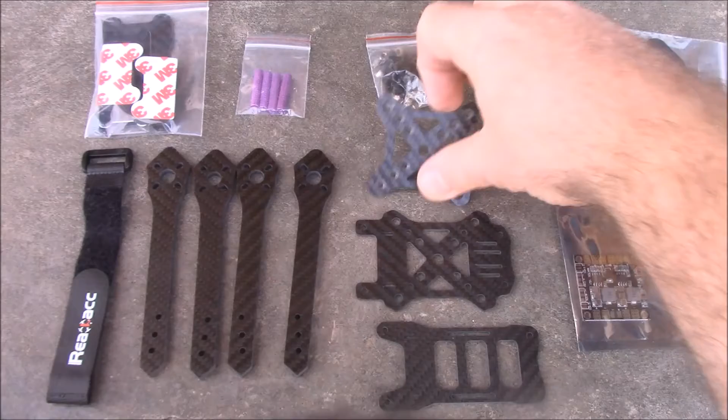Here are all the parts laid out. Now one thing that's kind of cool about this frame, they put these little countersunk screws that are supposed to go in here to help hold this together. You actually have 3 on each arm that you'll use to put it together.

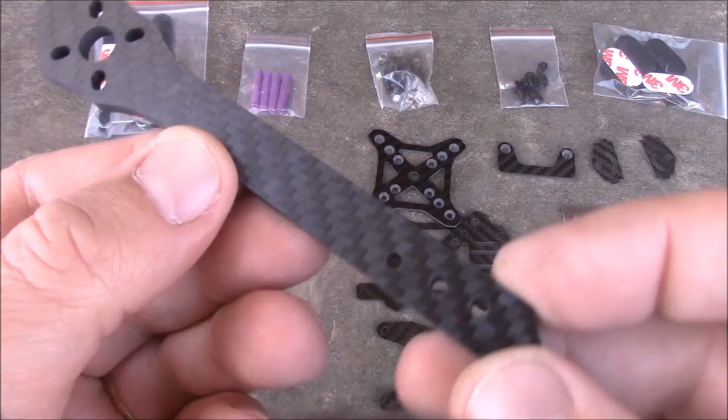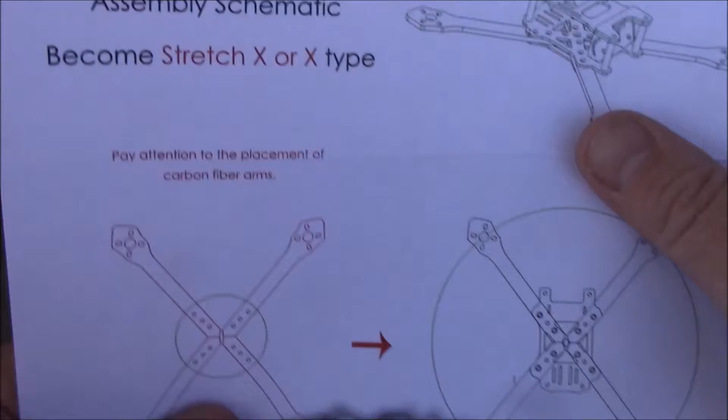Now this is a little bit unique frame. If you look here, you can see how the holes are not lined up straight down the arm, they're kind of angled off to the left. And that is because this is the Angel 220. The Angel 220 is set up so that you put the arms together in one pattern.

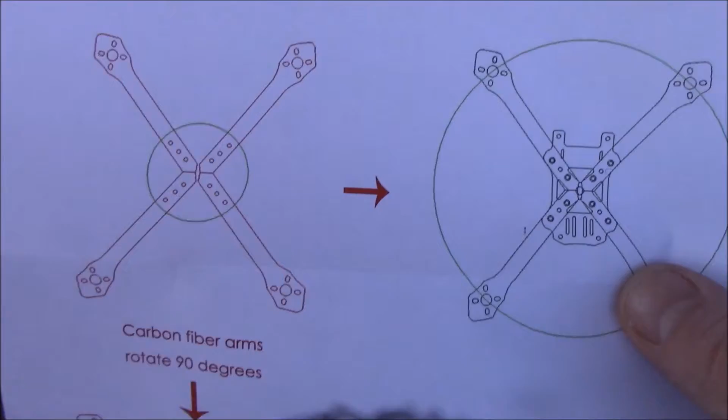You can put it this way and put the pod up on top here going this direction, or you can take it and basically rotate it 90 degrees, and then put the pod on the other way so it's stretched wide. So this one can be stretched forward and backward, or rotate the pod 90 degrees and it stretches wide.

The cool thing about that is you don't even have to change the arms, and the arms are cut with those holes, and that's what provides all the magic. They're not too close to the edge, as you can see, so they shouldn't have any tendency to break. And you have 3 screws in there.

Actually, you'll have 2 plus your flight board in there. But anyway, you'll have at least 2 screws in every arm, helping hold the frame together. Another thing I like about these frames, and I've been seeing this a lot, is when the top and the bottom plate aren't the same. I like it because I think it looks cooler, you don't have the top and bottom plate matching up perfectly, so it gives a little bit better look to the frame itself.

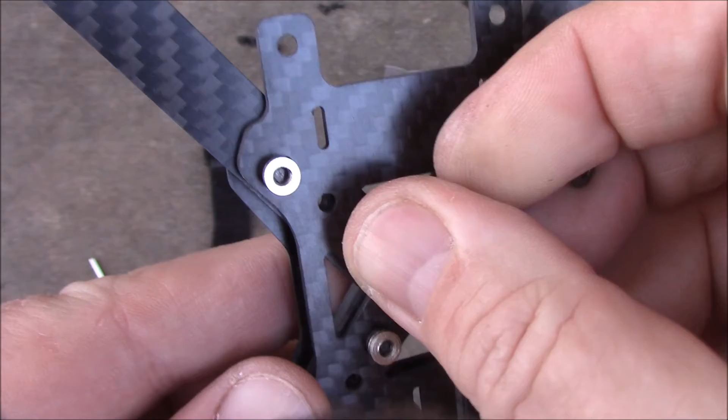Here's the frame partially put together. Now, like I was saying, this is the middle plate, and you can see here this is a little bit larger hole and this is a smaller hole. The larger hole is to accommodate these little nuts of some kind. They slip, the holes are a little bit larger, and these will slip down in those holes. Well, they will when you tighten up the screw.

It'll pull down inside there, and basically instead of having a regular nut up here that you have to hold with a pair of pliers, these will actually eat into the carbon fiber a little bit and provide some grip, so that way you can really crank down on them and tighten your frame up so it's not flopping around.

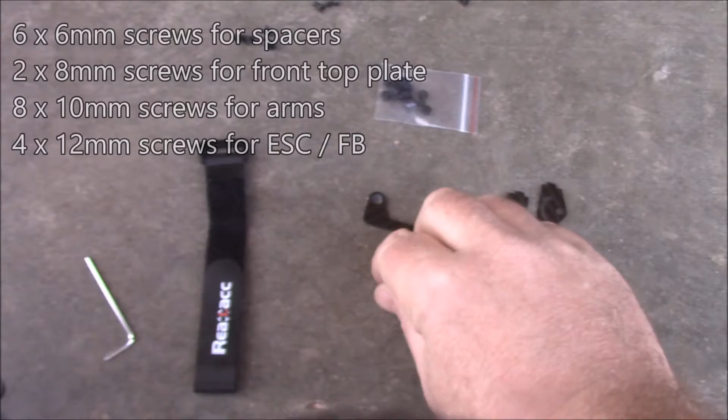Now also on here you'll see it has these middle holes, and this is where the flight board screws will go through. Now this actually came with some really short screws, a little bit medium screws, and a few longer ones, but it had mostly this size here. Two of these 10mm screws will hold on the arms. Each of the arms is going to be held on in the middle and out here on the outer edge, and they go up there into those little nuts.

Then the longer ones will actually be used to go through the middle to connect onto the nylon spacers to hold your flight board into place. Like I was saying before, on the 220, the 4 arms just sit in the same place, and they just rotate 90 degrees to determine whether or not you want a stretch front to back or a stretched side to side. Now the 220S, which looks a lot the same, is not so much the same.

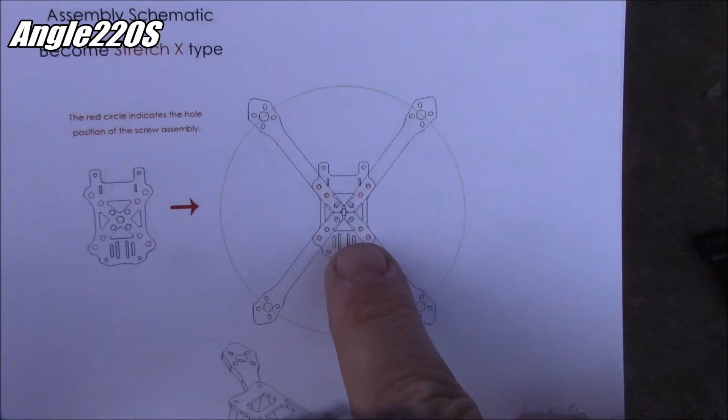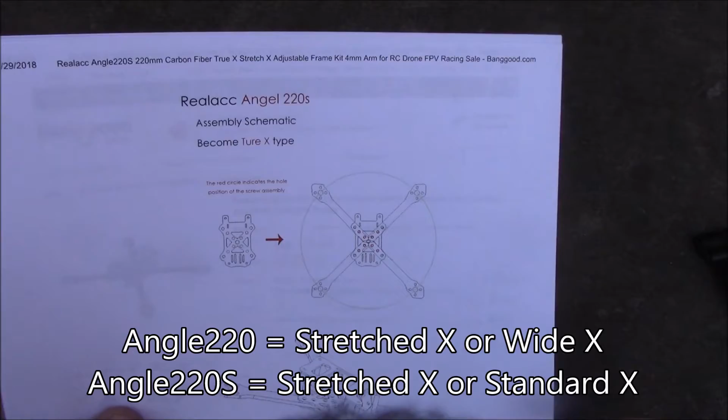With this one, if you put the arms on here and use the 2 outer screws, you're going to end up with a stretched X frame, and this is on the 220S, not the one we're looking at. If you change it up and use the 2 inner screws on the 220S, then it goes into a standard X form. So if you want a straight X form, you'll want the 220S. If you want a stretched front to back or side to side, you'll want the other frame, the not S, the 220, the one we're looking at here in the video.

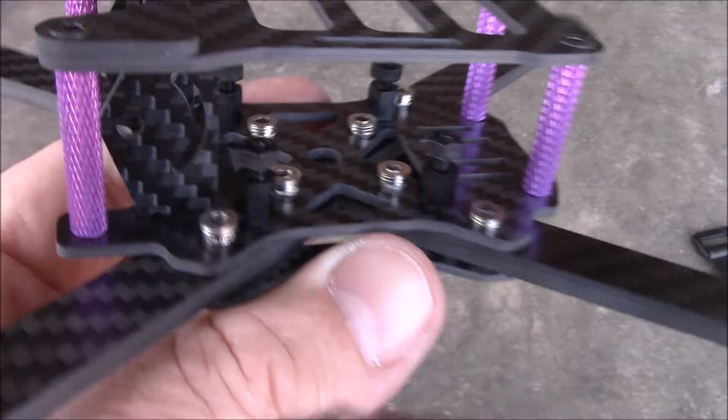So here's the frame assembled, and if you look here, you can kind of see these nuts. This one is actually tightened down, and it pulls into the carbon fiber, which gives it some grip, so you can tighten down on these screws and it won't spin up there. This one up here is not tightened up, and you can see how it's sticking up a bit, with those little vertical grooves underneath. When you're tightening this up, you want to tighten it until those grooves disappear into the carbon fiber, and that's what helps hold it to the carbon fiber.

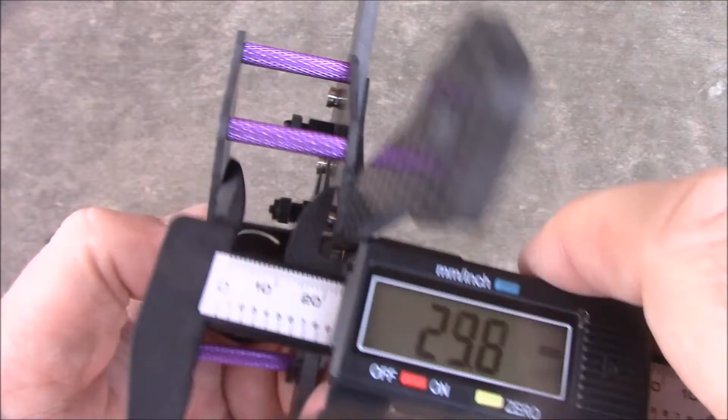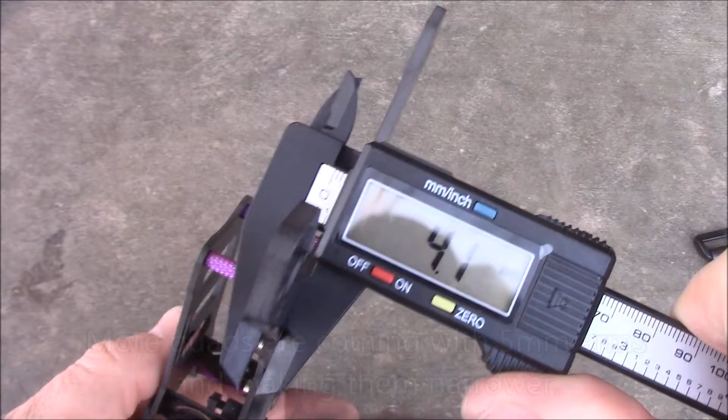So here's the caliper, and these are, I believe, 25mm spacers because it feels kind of short. Yep, 25mm spacers. And these arms, see how thick these are? They're about 4mm, which is kind of what I was hoping for, and they're about 12.3 wide, so not too bad there.

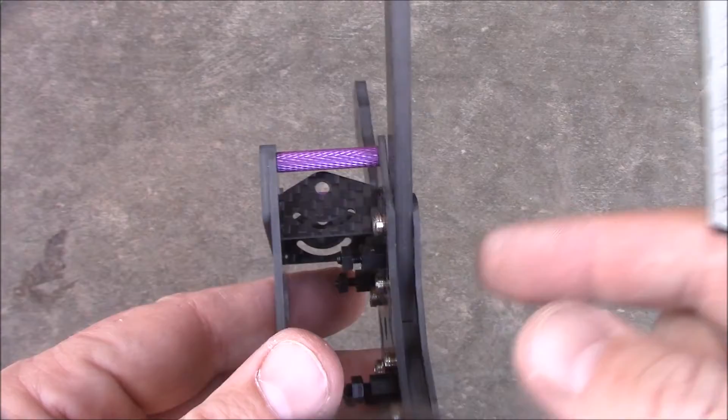This top plate is 2mm thick. These bottom plates don't really matter much since there's two of them kind of sandwiching it — the middle one is 2mm and the bottom one is 1.5mm. That's okay, there's nothing special about having a thick one down here if you're going to have two sandwiching this together. Now if you're going to have just one plate on the bottom of your frame, you really want it to be a thick one, because it's going to be taking all the stress from the arms and not sharing it with another thinner plate like this. So anyway, that's not too bad.

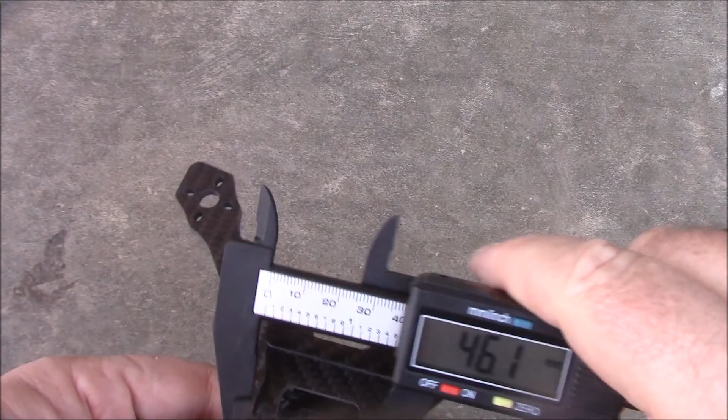This whole top plate up here is about 46 millimeters or so. And the nice thing about this is it has the battery strap holders on top, so you can run your battery on top, or try to run it on the bottom, but you're going to be running your battery strap in between the little nuts up here so it has something to hold onto, because you're not going to squeeze it through there — there's no space.

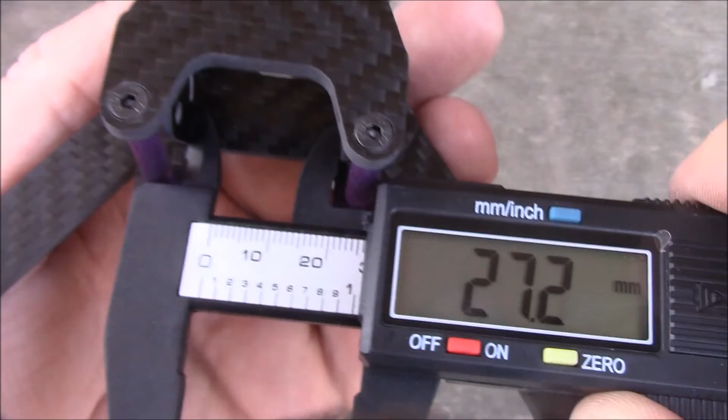Up here in the front, this camera holder is designed for something that's about 27 millimeters wide, which is not going to be your micros — it's going to be more of your HS1177 size of camera.

Here I have the PDB installed, just to give a little bit of size here and see how it looks.

Now one thing that's kind of nice about this frame is it has these holes back here, and what those could be used for is if you hook your battery wires up here and run them out the back, you can take a zip tie and zip tie it down to the bottom plate. That way, when you're pulling on the battery cable, or if the battery comes out and yanks on the cable, it's going to put stress on those zip ties instead of up on your solder pads. So that's a really good thing to have, and I wish more frames would actually do that.

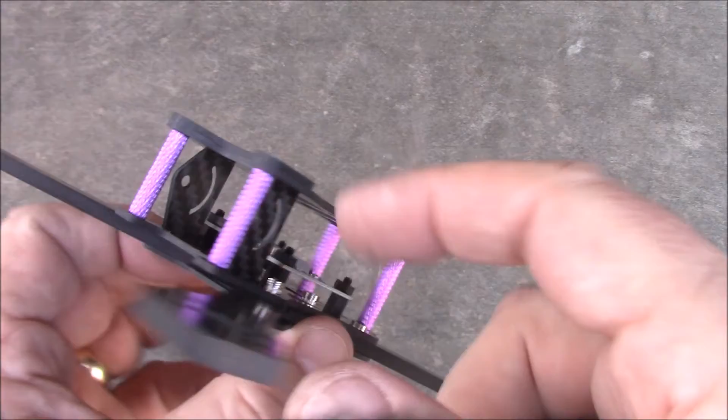Now, the one thing I'm kind of disappointed about is — here's an HS1177 style camera. This one is broken and was covered in hot glue at one point.

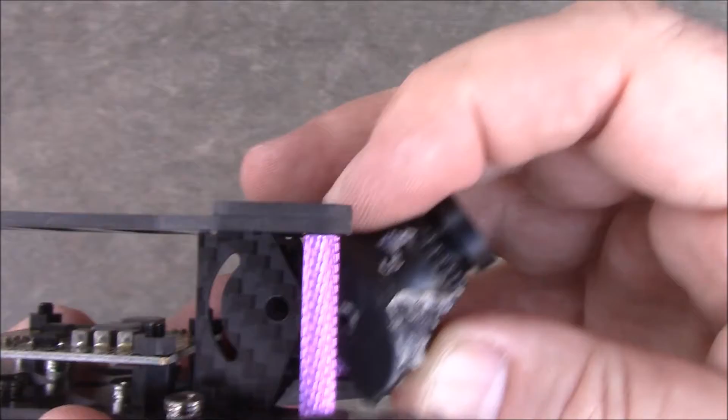Okay, so here it is, and if I slide this back here, the holes don't quite line up with the holes on the camera mounts. They're a little bit low, and I can't go up any more because it's bumping its head against the top plate. So I can't get this in here in a way that the holes actually line up. Well, I guess if I do that, but now it's not even straight, so it can't fit. I don't know how you're supposed to mount an HS1177 style camera in here.

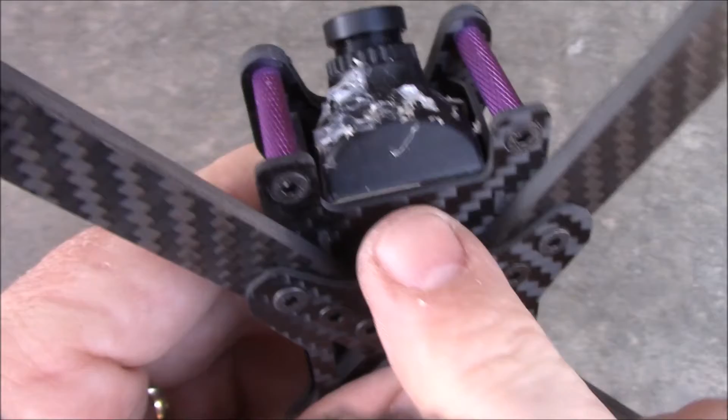So if you're actually going to use this 77 style camera, you're going to want to mount it not with these things — you're going to have to use some 3D printed mounts. But even then, it comes in here, and if I push it in hard... that was bad. Push it in here like this. This is actually flush down at this corner on the bottom, and up here it's touching the top of the frame, so it's not going to fit in there very well.

And even back here you can see where the camera power cable comes in — it's going to be fighting for space with your flight board trying to fit in there. Also, you see how much of the camera is sticking out. That's not too big of a deal, but it's just knowing that if any pressure hits on here, it's going to be pushing onto your camera and also pushing back onto your flight board.

The idea of this is cool, but I don't think you're going to be flying with an HS1177. You're going to have to get some kind of micro camera, then have some adapters 3D printed to hold the micro in place. So that part of the frame, not so thrilled about.

Looking back here on the back, there's not any real good way to mount your VTX to the upper plate. But a lot of people, especially those doing racing, are just putting their video transmitter right on top of their stack or inside between their stack, with larger spacers between the two boards to make room and sandwich it in with some foam tape.

Then they take the antenna and run it out along the rear arm and just tape it on, or use some 3D printed stuff to hold it to the arm one way or another. If you put the VTX antenna on the rear arm and tape it there, it'll probably be fine for racing, especially when you're not going out very far. You might have a little breakup when it turns at a certain angle and it's going through the carbon fiber, but for the most part, for racing, taping the VTX antenna to the rear arm shouldn't be an issue.

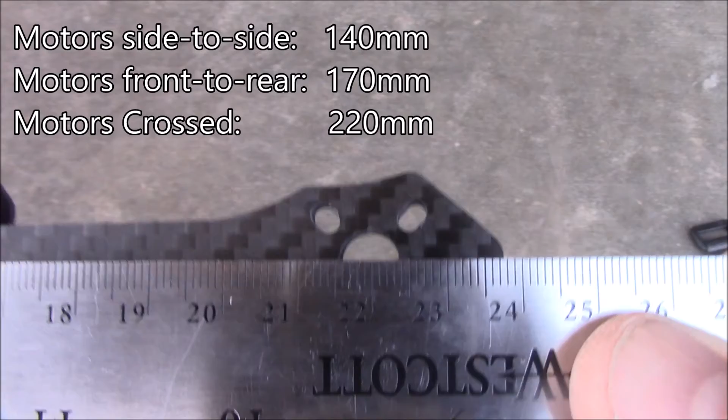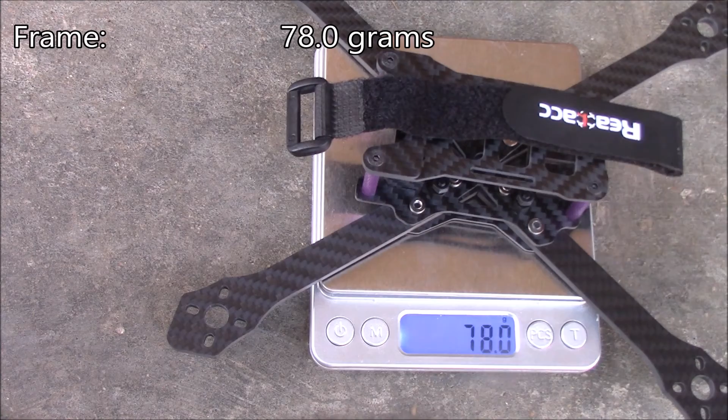This is advertised as an XS220, and it is spot on 220. With the frame fully assembled, on the scale it comes in about 78 grams. If I throw on the included battery strap, it adds about 3.4 grams.

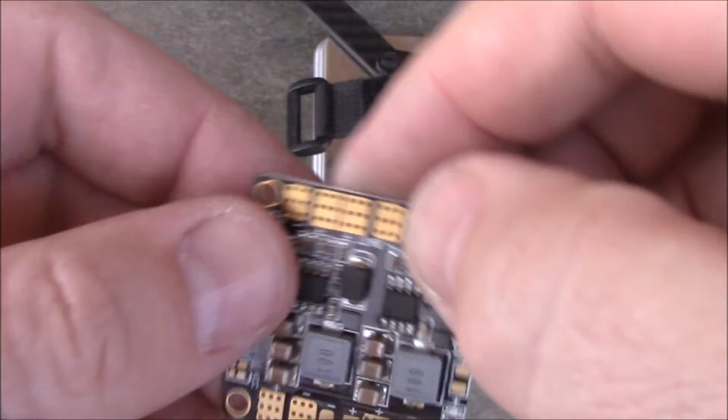Here's the power distribution board, which is also included. This has a 5 volt and a 12 volt output. So with that added too, it goes up to about 87.3, 87.6 grams.

Not too bad of a frame. Most ultralight frames run anywhere between 70 to 90 grams, so this one would classify as a heavier ultralight frame. It'd probably be pretty good, especially with the 4mm arms.

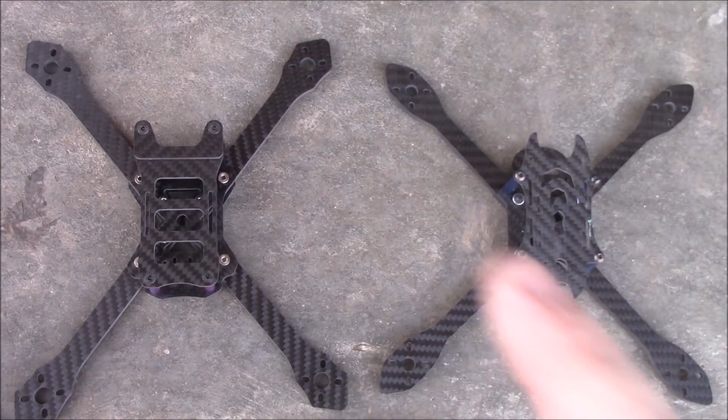Here's the Engel 220 sitting next to the B-Fight 210. This one is stretched, while the other is a standard X, and you can get an idea of how much different they are. This is actually, I believe, a 210, where this one's a 220. But to achieve the stretched X form, they usually have to stretch the arms out a little bit to keep them from smacking into the pod up here in the spacers.

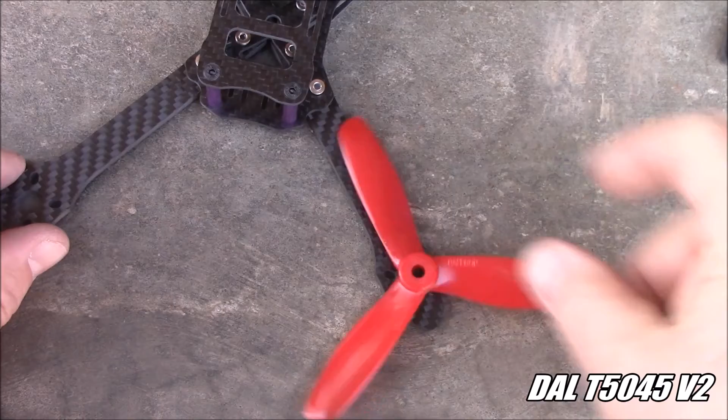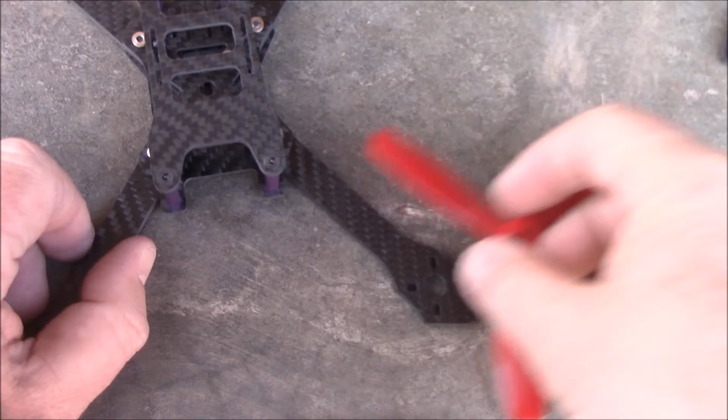Here's a 5-inch prop, and if I center it over this hole, you can see it's going to clear the frame with no problem at all. The reason you can't make this arm much shorter is because you'd come close to hitting a prop on the other side, so you need it a bit farther from the body. Also up here in the front, if I put this up here, you can see it's going to clear this just fine.

Now, some people used to be worried about seeing the props in their camera. If you angle your camera up enough, the props may show up near the bottom, but for the most part, I think people are getting past seeing the props in the video. If you don't want to see props at all, the better thing to do is just get a GoPro and put it up on top.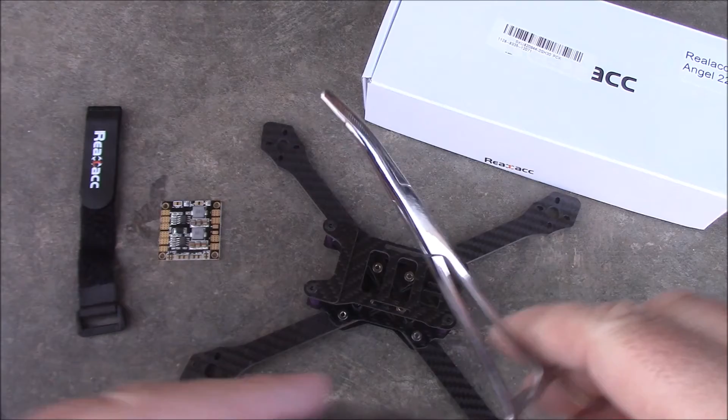On a completely random note, I've been using these hemostats to help put my quad together. It makes it nice to grab the wire up near the end, hold it into the solder, and melt it onto the board. This helps a lot, and I do not understand how people build these quads with their fingers when they're so small inside. Anyway, totally different topic. Hemostats are your friend. They don't burn your fingers.

Also, one other thing real quick. Look, they call this an Angel 220, whereas the website and everything else calls it an Angle 220. Well, take your pick of what you want to call it, but I think it's the Angle. No, I also have a hard time remembering which way to spell Angel versus Angle. I have to think about it every time.

Anyway, this is the Angle 220 frame, not to be confused with the Angle 220S frame, which is also available. This should be a pretty decent racer. You better have your stacking skills up pretty good. Don't plan on making it too tall, because you only have 25mm of space in here, minus the height of these lock nuts down here.